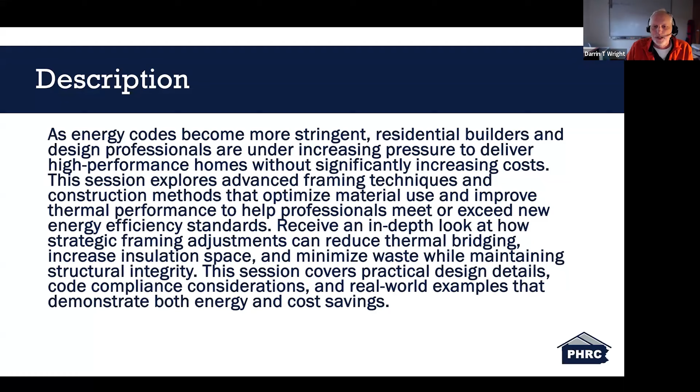We're going to do an in-depth look at how strategic framing adjustments can reduce thermal bridging and increase insulation space. This session will cover practical details and give you some examples of how these details can be achieved.

For the AIA people, our learning objectives: understand the principles and goals of advanced framing and how they differ from conventional framing; identify specific techniques; evaluate how advanced framing contributes to compliance with current energy codes, IECC; and we'll touch a little bit on voluntary standards such as Energy Star.

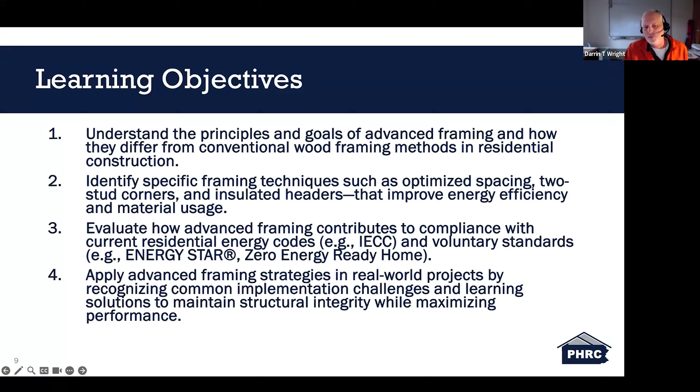Hopefully we can touch on all these things rather easily. We won't go into super detail on a lot of these, but we only have an hour, so we're going to try to touch on these as quickly as we can.

Agenda: framing fundamentals, advanced framing techniques, code considerations, and we'll do a little bit of a wrap up if we have time, and a Q&A.

First, I want to talk about what we mean by conventional framing. If you've been in the industry for more than 20 years, you can remember back when 2x4 framing was 16 inches on center.

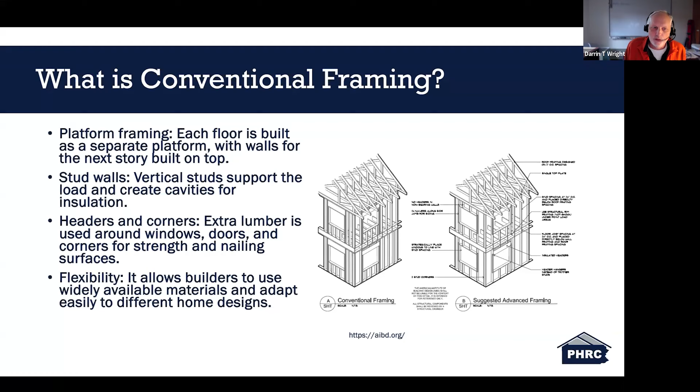When we think about conventional framing, that's really where we're going back to. It's still platform framing—each floor is built as a separate platform. Vertical studs support the load and create cavities for insulation. Headers and corners use extra lumber around windows, doors, and corners for strength and nailing surfaces. It's a flexible way of construction, which is why it's so popular here in the US.

But we're going to touch on some of the techniques used in conventional framing and how they differ from advanced framing, and also some of the drawbacks of conventional framing. We get a higher framing factor. That word, framing factor or framing fraction, is going to come up a few times throughout here, and we'll get into the details of what that actually means.

The cause and effect of that higher framing factor is you use more wood. Anytime you use more wood, you're using less insulation. Every time you use more wood, you have higher material and potentially higher labor costs. And there's really no structural benefit to conventional framing over advanced framing.

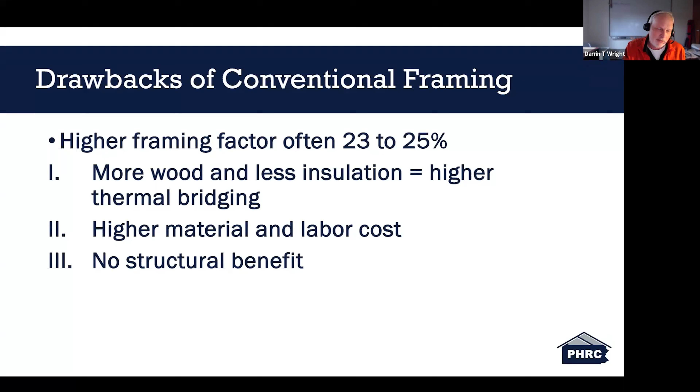That's one thing people get concerned about—maybe it's not structurally as strong as conventional framing—but I'll try to explain exactly how it is. We're going to start with a quick overview.

What is advanced framing? It's a collection of optimized wood framing strategies for performance and efficiency. We're going to cover quite a few different techniques when we say advanced framing. Some will be way more obvious to you than others, and some you'll think, yeah, I can easily bring that into my building practices. And some you'll look at and think, that's not for me.

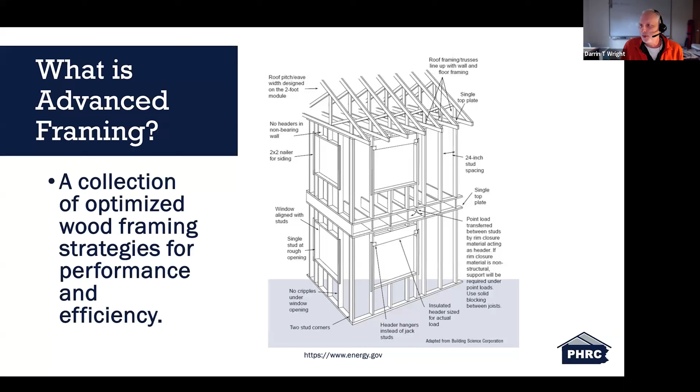These are things that are, for the most part, not a requirement when we talk about framing, and I'll explain that as we go along too. But they're just a way of optimizing both material and increasing energy efficiency in a home.

What does advanced framing do? The main benefit of advanced framing is to reduce framing fraction or framing factor. If you've been in this industry long enough, or travel from one part of the country to another, people call things different things. I'm going to use mostly framing factor, but it's also called framing fraction. It's a math problem we're talking about when we discuss this as well.

The framing factor, also called framing fraction or framing-to-wall ratio, represents the percentage of the wall's total area that is made up by framing members, which includes all your studs, plates, headers, etc. Any wood material used to frame that wall assembly is what we're talking about. When you reduce this framing material, you increase the amount of insulation that goes into that wall assembly.

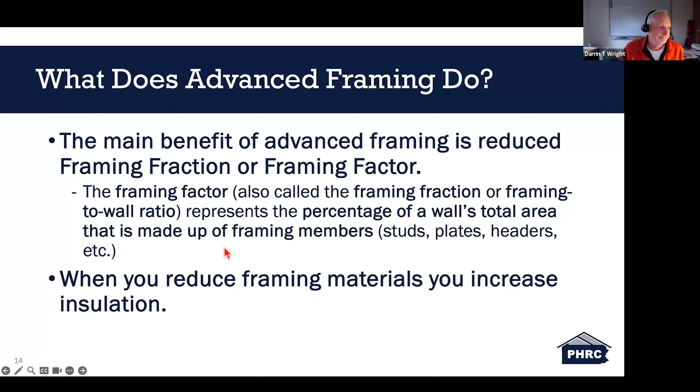Some more advantages of advanced framing: cost effectiveness. With the increased cost of lumber ever since COVID came through, we had that bump in lumber pricing, and it hasn't really come down a whole lot. We get some slight fluctuations, but lumber is one of those commodities thatstayed up a bit. So we're always trying to find ways of reducing the overall cost of a home, and that's one of the big things talked about now with residential construction and home ownership: how can we bring down the cost? This isn't a huge way of bringing down the cost, but it will, and every little bit helps.

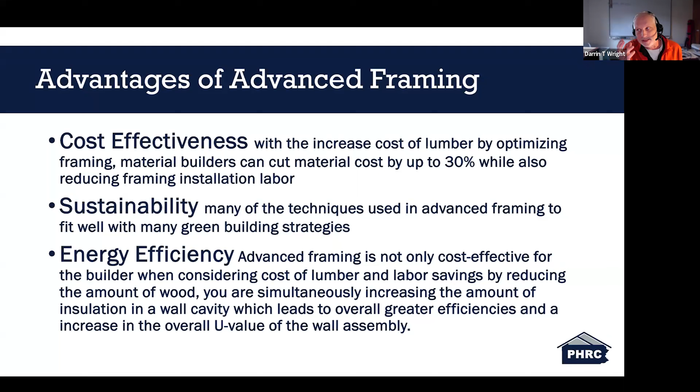And we talk about sustainability - many of the techniques used in advanced framing fit well with green building strategies. And energy efficiency: advanced framing is not only cost effective for the builder, considering cost of lumber and labor savings by reducing the amount of wood, you are simultaneously increasing the amount of insulation in a wall cavity, which leads to greater efficiencies and an increase in the overall U value of the wall assemblies. Anytime we can make a house more efficient, we're reducing the overall cost of ownership to the homeowner taking over this home. So the more energy efficient, not only is it sustainable, it's more cost effective for the owner as well.

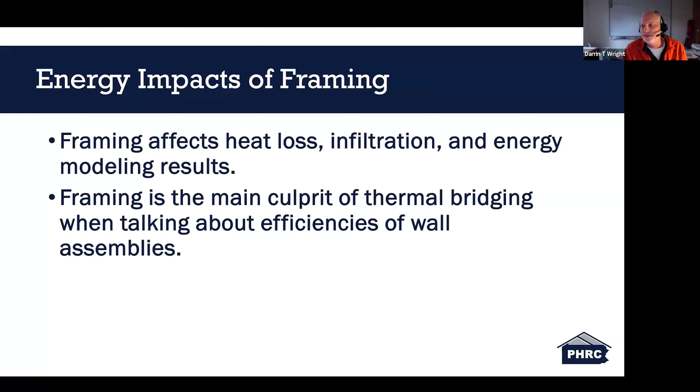Energy impacts of framing - how does framing impact energy? Framing affects the heat loss, infiltration, and energy modeling results. Framing is the main culprit for thermal bridging when we talk about efficiencies of wall assemblies, and I will talk about thermal bridging a little more here. If you've tuned into things we've talked about before, when we talk about framing or any of our energy code updates, we talk about thermal bridging.

So if you're unfamiliar with what thermal bridging is - we know what a bridge is, it's a way of moving from one side to another, like a bridge over a creek. Thermal bridging is basically the same. It's a way for energy to bridge the gap between the outside of the house and the inside of the house. Wood is not a good insulator - it has an R value of approximately 1 per inch. So those are places within the wall where we're creating a bridge between the outside and inside, or inside and outside, where energy can travel easier.

Thermal bridging in a wall assembly are areas of less or no insulation. And I want to point this out too: we will never eliminate thermal bridging. You just can't - the law of thermodynamics is what it is. We cannot stop that move of energy from one area to another. What we're really trying to do is create choke points and restrictions which slow that down. By reducing the amount of wood or bridging within that wall assembly, that's one of the ways we're doing that. There are other techniques as well, but we're going to mostly talk about framing when we reference thermal bridging in this presentation.

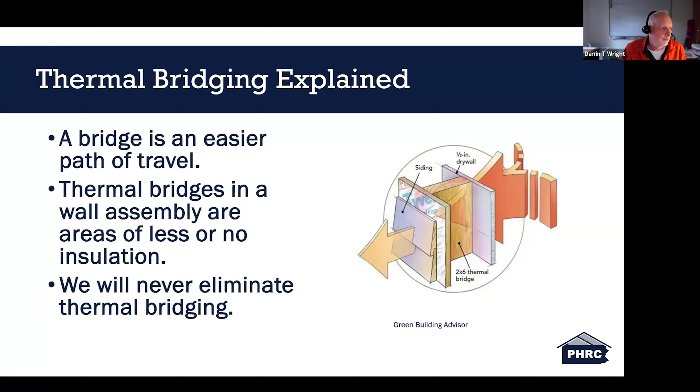Here's some impacts of thermal bridging. Here's an example: a 2x6 wall with R19 insulation - we think, all right, we put that R19 wall insulation in that wall, we have an R19 wall, but you actually don't have an overall wall value of R19. In research, I pulled this: Oak Ridge National Laboratories determined the whole wall R value to be closer to actually R12.

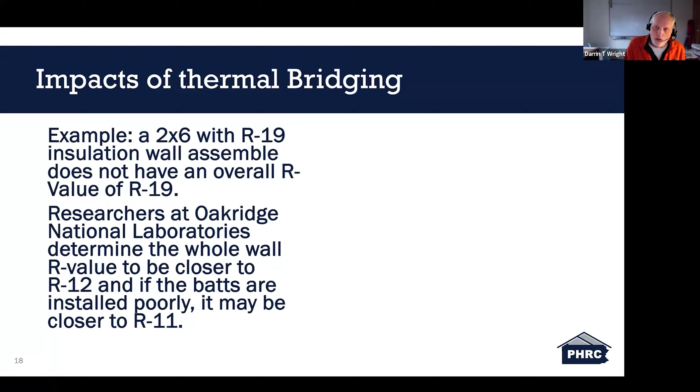And if you don't install the batts properly, you can be down to R11. And that right there is a direct result of thermal bridging. If you could theoretically have a wall with no wood in it at all, and it's just R19 insulation the whole way, and it's installed properly, you can get close to that R19 number. But because of thermal bridging, it doesn't. So it really affects the overall R or U value when we talk about the wall assembly itself.

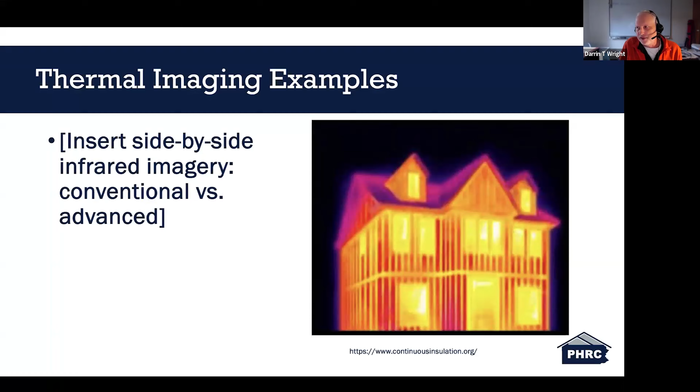Thermal imaging, here's an example. I don't have a picture of advanced framing, but this is what we look at when we see thermal bridging in an IR camera. This is very strong, very pronounced - definitely older conventional framing when you see how close those studs are together. You can see areas within that house that have insulation and areas that don't.

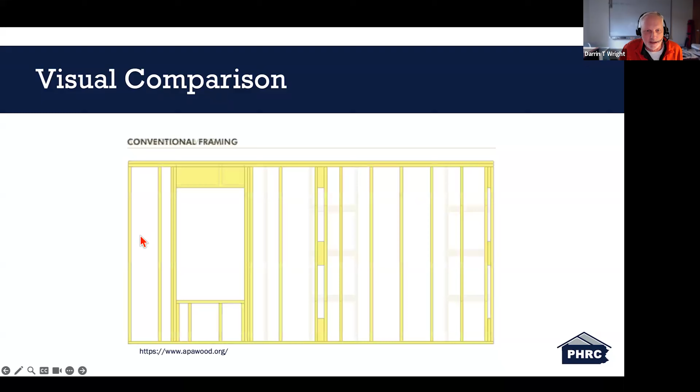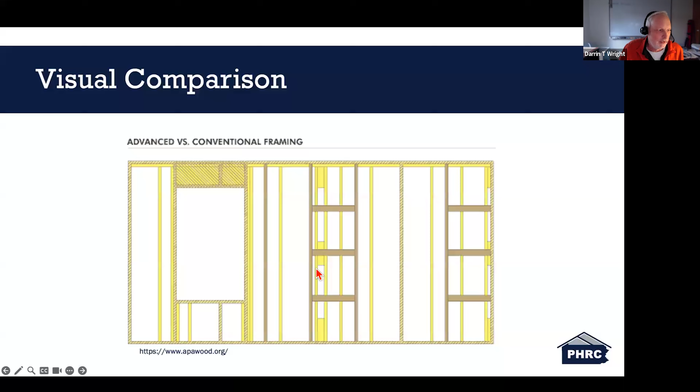Not all the techniques you see here are ones you might want to use, but we'll try to touch on some. You can see the jack studs disappear, they're using header clips, a single top plate. At wall intersection points, they're using cross bracing rather than the two-stud intersection point - but we'll talk about that as we move on.

A side-by-side comparison of conventional framing and advanced framing. One aspect is stud spacing - we're going from 16 inches to 24 inches on center. I think most people now are using 24 inches on center. That's what we have to do to create a cavity large enough to get the insulation level high enough to reach our R-value requirements on the fenestration table.

Conventional framing corners are old school 3-stud corners. We're moving on to 2-stud corners for better insulation optimization. Headers: you've got double 2x10 or 2x12 at all openings, insulated headers sized to load - that's advanced framing. Top plates: double top plate everywhere conventionally, versus single top plate with truss and joist alignment as a technique of advanced framing. When we talk about top plates, what is a framing factor?

Conventional framing factor, like I said earlier, is between 23 and 25%. With advanced framing, we're trying to get that down to at least 19% or lower.

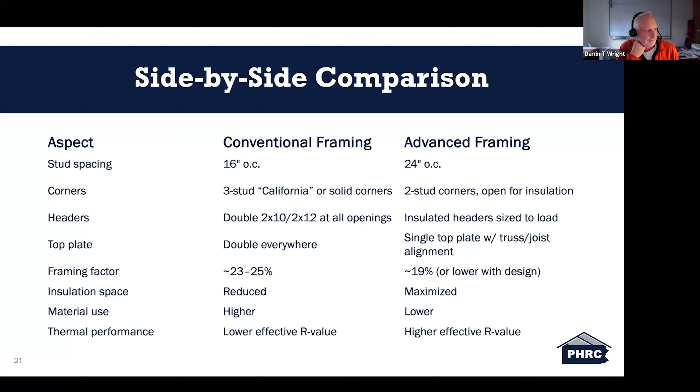With insulation space, conventional framing is obviously reduced, and we're maximizing with our 24 inches on center. Material use - we're actually using less material with advanced framing, and it can be a pretty significant amount of material savings. We also get an effective overall higher R value.

So we'll take some of the details here. When we talk about details, you're going to see me show some examples of things - that doesn't mean this is the only way to achieve this. It's just some of the most common ways out there. There are multiple ways of framing, so don't look at me like this is how I have to do it - it's not necessarily the case.

Design the headers based on the type of wall - load or non-bearing. This is an example - you're seeing a non-load bearing wall, and there is no header. I recently went by a job site a few weeks ago, just a conventional builder, and they were actually still installing headers over openings in a non-bearing wall. So you have to be conscious of where.

I know if you have a young framer in there and they're just framing away, that's what they know, but you've got to start paying attention. People need to start asking, do I actually need this size header? Am I oversizing things? You want to start looking at your details more closely when installing headers in non-load bearing walls.

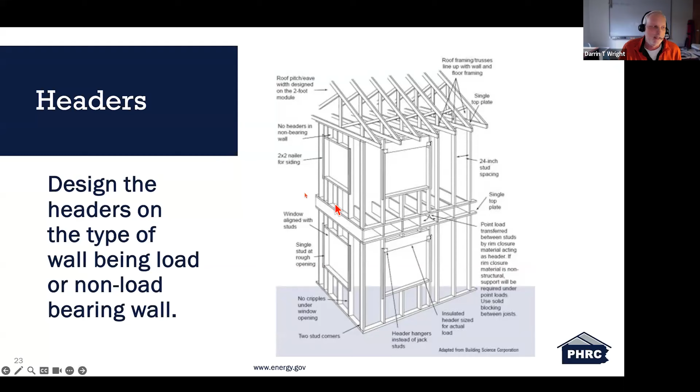To talk about headers a little more - this is mostly site-built headers. There's many different ways to order headers now. You can order prefabricated header material, or you can still use the old 2x method where you're installing 2x material. We want to start - and we'll talk about header insulation a bit later when we discuss compliance - there are different ways of insulating your headers, and how you insulate them might also determine whether you want the material on the inside or the outside.

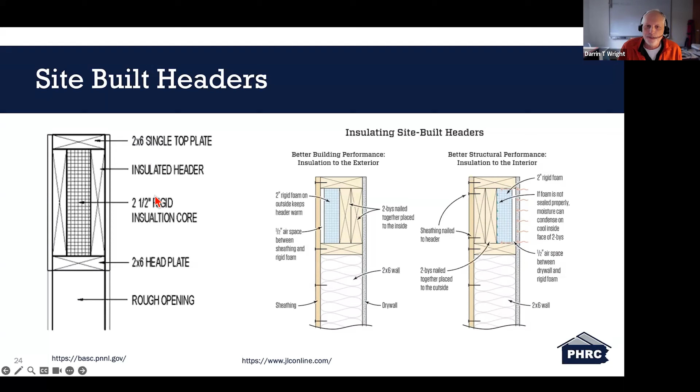There's really no wrong way or right way to do this at this point. The most important factor is making sure you're getting the proper insulation, or as much insulation as possible, into that header plate, into that header material. And obviously you can buy pre-manufactured headers. They're going to be a little more expensive, but installation costs might be a little cheaper because it's a little faster and there's a little less thinking involved.

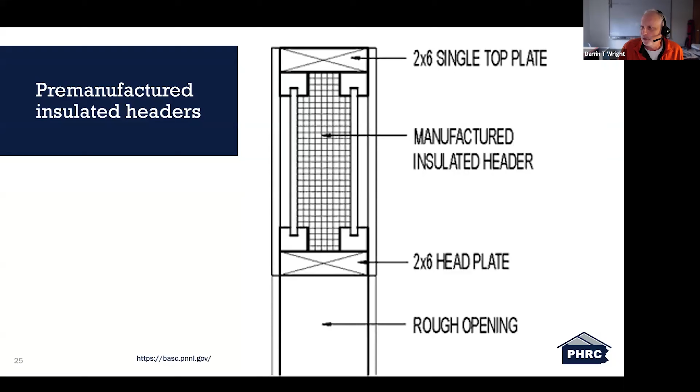If you want to make sure your crew is actually installing insulated headers correctly, this is an easy way of taking some of the worry out of it when you're not on the job site, making sure that it's being done properly.

Another thing we can talk about when we talk about headers and advanced framing is reducing the jack studs. This is not a very common method of construction here, just because people like to have that jack stud in there, not only for holding up the header, but also because it creates a better nailing surface for when we talk about trim details.

There's things you can do around it, and when you talk about cost, it's almost the same cost to buy that header clip, that supporting header from Simpson's or wherever you're getting it, as it costs to buy that piece of 2x material. So as far as cost goes, it doesn't really help, but it does help with lowering the overall U value of this wall assembly.

Again, we're removing wood in a location so we can put more insulation. Not all of these techniques are necessary, but if you're really looking to dial in, if your goal is to get your wall assembly as efficient as possible, header clips are another tool you can use to reduce your overall framing factor or fraction.

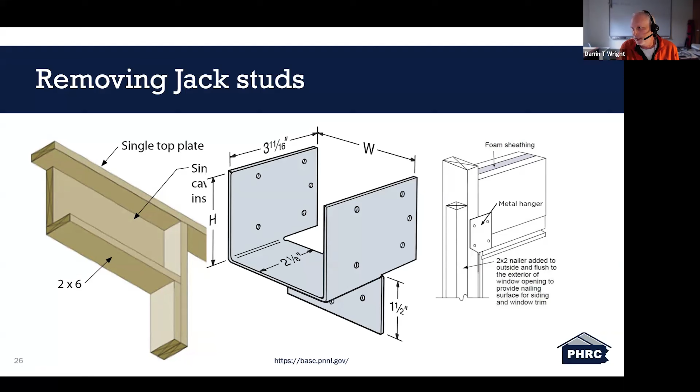Here are some of the concerns of header clips: load requirements still apply, these are engineered. You want to make sure you're using the correct size header clip that's engineered to support the size of the header you're putting in. Jack studs in conventional framing transfer vertical loads from the header down to the sole plate and foundation, and these clips are taking the place of those.

Bottom line, details need to be thought out. One of the biggest concerns people are going to have is the trim details, and how you're going to attach your interior trim and your exterior trim as well.

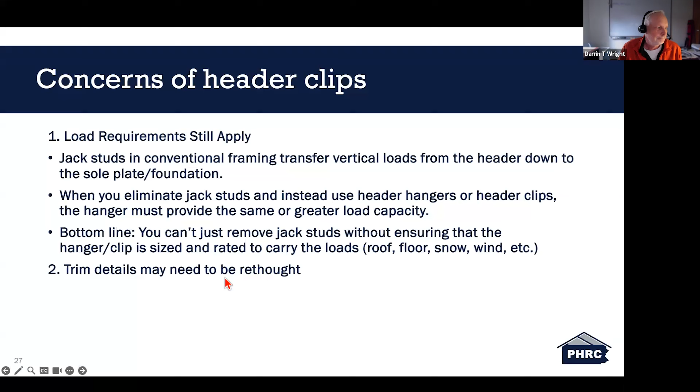Corners - this is a big one. Traditional frame corners, as you can see here, there's no way to get insulation into this corner. When I started in this industry many years ago, this is how we framed corners. Corners were just areas of connection on the exterior outside of your framing assembly, and you always wanted to make sure those connection points were strong.

So your building would be safe. And what we want to move forward with, especially when we talk about increasing the overall R value of our wall assembly, is removing some of that material in a way that allows us to get better insulation into the back of the corner.

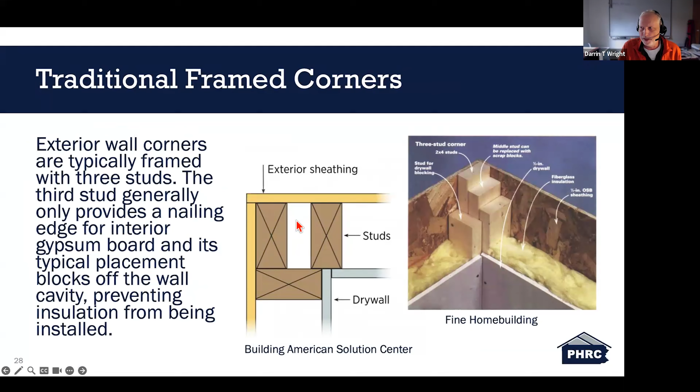Now, theoretically, you could jam some insulation in there as long as your sheathing's not in place. But anytime you try to pack insulation into a cavity like that, it's not going to be very well done, and you're still bridging multiple spots in this corner.

Now let's talk about insulated corners. It allows more insulation in the corners compared to traditional three-stud corners. Here are two different ways of doing that. The one on the left is a typical two-stud corner - we're all familiar with those California corners. These are great because you can still insulate that corner all the way back, as far as you need to insulate it, so you've pretty much reduced that thermal bridging in that corner.

Now, you got to be careful here when insulating these types of corners. If you're using fiberglass insulation, you don't want to compress it to get it back in that corner. You're going to have to do something a little different - maybe use foam board insulation cut to the width of that stud you're using as your corner. You want to make sure you're not compressing or installing insulation poorly in that corner. You still want to make sure you're installing your insulation correctly.

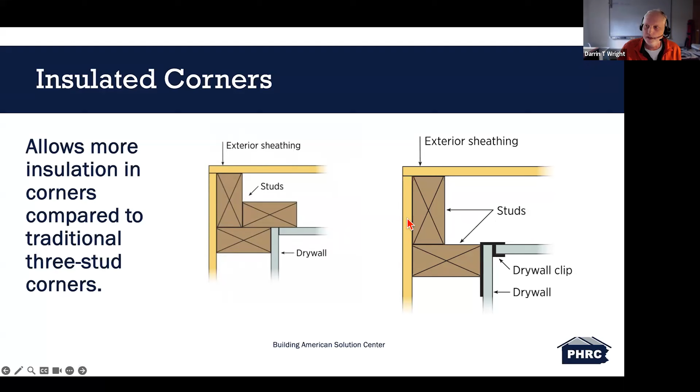Wall intersections. Traditional T-post intersection is what we're familiar with. The space may be insulated from the exterior, but traditionally it is left open, and it leaves a large 3 to 6 inch section of the exterior wall cavity poorly insulated or not insulated at all.

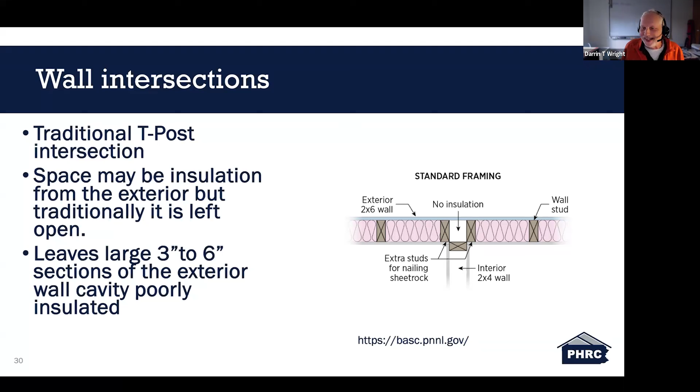And again, anytime you bring in, unless that wall intersection lands on a framing member or a common wall stud, you're going to have to not only have your 24 inches on center studs, now you're introducing more vertical framing material between those 24 inches on center where you're not going to be able to get insulation. You're just bringing in a lot more framing material into this wall assembly, and we're trying to get that framing material out of this wall assembly as much as possible.

A few different ways of addressing this. Ladder blocking at intersections is the most common type we see now. It doesn't mean it's the only way, but this is probably the easiest for people to understand. It simplifies connections and preserves insulation space, allowing for better insulation at wall intersections.

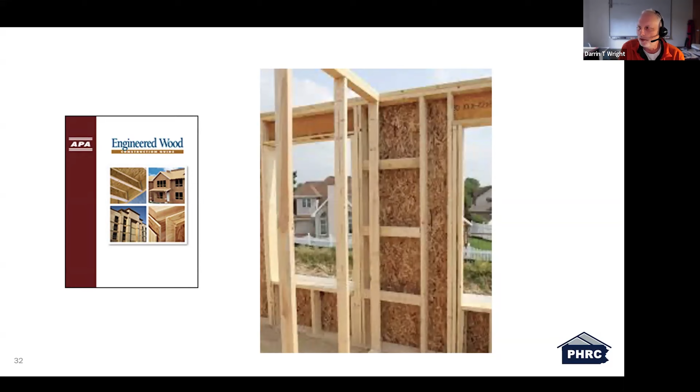And what you got to be more careful with here is if you have a 2x6 wall cavity and you're using a 5.5-inch insulation designed to fill that wall cavity, you're starting to get some compression at this point where you're having to slip it behind these pieces of 2x material. And that does start to compress, and it does start to affect the R value of that insulation. It's not a whole lot of space, but it is starting to affect the quality of the insulation installation.

And now some techniques for eliminating that. One thing you can do is support post-wall intersections. I've seen this a few times. All you're doing is installing a piece of, say, 1x6 on the back of that, if it's a 2x4 wall that's intersecting. Now if it's a wet wall using a 2x6, that's going to be a little different. You're going to have to find something else to go along with that. But what this 1x6 does is provide a connection point for your drywall.

And that's what the ladder is as well. With the previous slide, those ladders, their main objective is as a connection point. It does add some stability and rigidity to that wall assembly, but it's also mainly there so your drywall has something to attach itself to. Because once you nail that wall to the floor, the base plate, and connect your top plate, that's a pretty rigid wall assembly. So by using a 1x, you're really only compressing that insulation 3/4 of an inch. It's really not compressing that much.

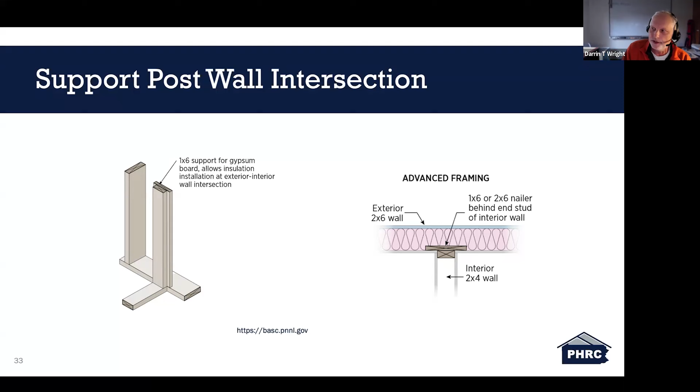The benefit of using the ladder system is there's a lot of scrap lumber laying around your job site, so that's the easiest thing to do. You just got to be careful you don't have somebody throwing 5 or 6 pieces of ladder in there, making it a lot harder to get insulation in, as well as compressing it.

And there's clips as well. You can use drywall clips when we talk about these connection points. Again, it's a technique not used very often, but that is an option. You can use drywall clips.

And if you happen to use a single top plate, which we'll talk about next, that connection point is still connecting at the top like you need to. But this advanced framing technique for a wall intersection limits all extra lumber within that wall assembly, and you're just using drywall clips. So you can insulate that cavity, and it'll be insulated like every other cavity within that wall assembly.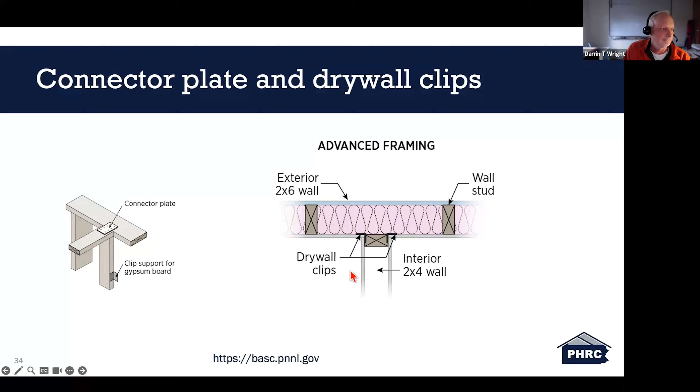Now I'll talk a little bit about single top plates, not a whole lot. This is, I think, one of the areas where people are less likely to get into advanced framing. There's a lot of things that have to be thought about when using single top plates. But it is a technique you can use. You're eliminating some material when you go from a double to a single top plate at the top of your wall assembly, but you're introducing some other potential headaches as well.

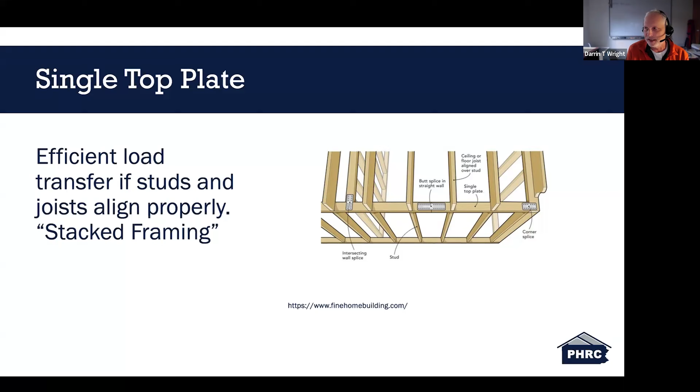So this is mostly an uncommon thing, unless you're really getting into advanced framing, like passive house design, where you're trying to get your framing factor down as low as possible. And there are things you have to consider when you're going to use a single top plate.

One of those things to consider is your bearing. You have to be more conscious, and we use what's called stacked framing, where if you have that single top plate, you want to make sure your rafters are bearing directly over your wall cavity stud. So you're transferring your wall loads directly down your wall assembly. We all understand structures when it comes to load, and how to transfer loads from the roof down to the foundation.

And I am not 100% sure on the code language on this, but I think if you're doing the stacked framing, stacking your studs underneath your rafters or your rafters over your studs, you have to be within 3/4 of an inch of alignment. You pretty much have to be right on - you can't offset that at all. Playing on zero is what you want to think about.

But it is a possibility. When we talk about a single top plate between floors, you have a rim joist which acts as a header at that point. So your load transfer concern is a lot easier to think about there than it is when you talk about where your rafter meets your top plate.

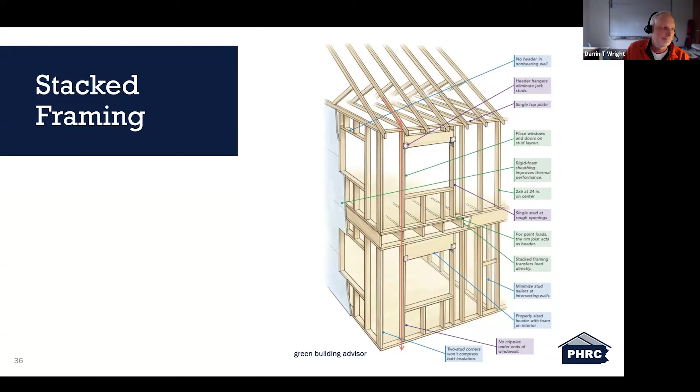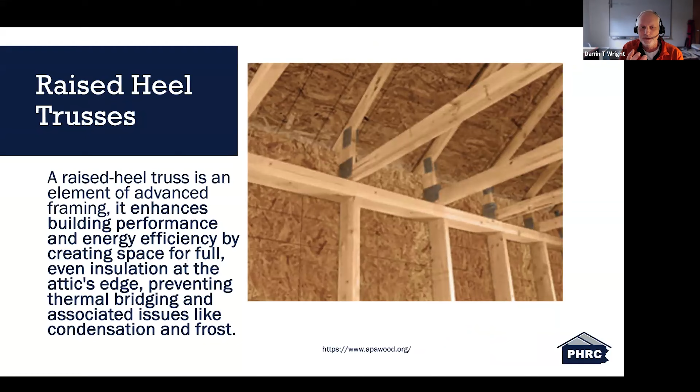Raised heel trusses are becoming a lot more popular because of the R value requirements, but they are a type of advanced framing. You're not going to frame these things on a job site. This is something you'll think about when ordering your trusses. It's an element of advanced framing. It improves overall efficiency, creates space for a full cavity of insulation up there, eliminating a lot of thermal bridging. This is considered part of advanced framing.

Advanced framing and energy code compliance. I'm going to touch on certain things and try to get a bit more in depth in certain areas, but this is how advanced framing plays into energy code compliance when we talk about Pennsylvania. If you've been to one of our webinars before on PA UCC Residential Energy Code, it's a combination of the IRC and the IECC. We have our RAC amendments, and we have statutory amendments, which I won't mention here, but those are basically how our UCC is determined.

We also have what we call the Pennsylvania Alternative Residential Energy Provision, and I'll talk about that in more depth and why I think that's going to be important when we talk about advanced framing moving into the new code cycle that we're moving into, which is right around the corner.

Advanced framing in the IECC - the code doesn't mandate advanced framing by name, but it supports and rewards its use because it reduces thermal bridging. Less wood equals fewer heat flow paths and increases insulation volume. This means builders can use advanced framing techniques to meet or exceed the prescriptive R value or U factor requirements for above grade wall assemblies, or improve results in the RESNET/ICC 301 energy modeling pathways.

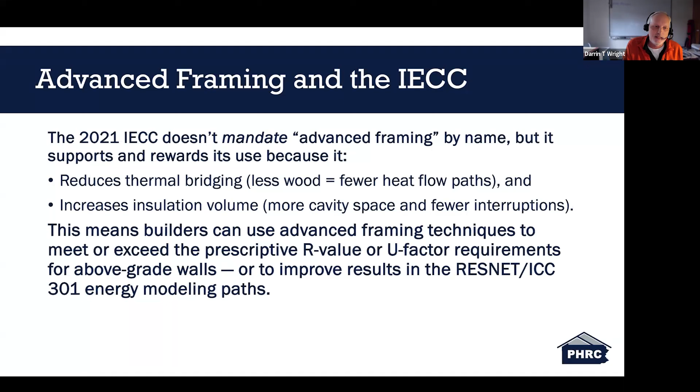How it fits within the IECC 2021 compliance paths - I've tried to make this as simple as possible. The prescriptive path, R402.1.2, helps meet required cavity plus continuous R values. By reducing framing factor and improving effective R values, a 2x6 24-inch on center wall might meet the R20 plus 5 or R13 plus 10 prescriptive requirements more easily.

If we're talking about R402.1.4, the U factor alternative, it lowers overall U value, reduces framing factors - we're getting that framing factor down to where it needs to be, out of that 25% range - and often qualifies walls for compliance even with slightly lower nominal R values.

Then we've got the simulated performance paths, where we're modeling our performance paths. It's a method of boosting your model efficiency in an energy modeling software. The improved whole wall R value from advanced framing yields lower energy use and better ERI scores.

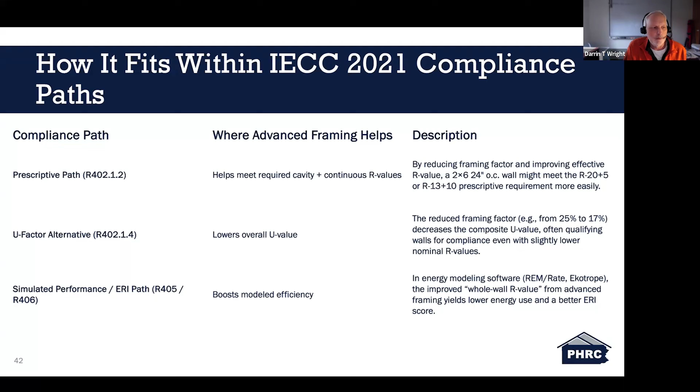In the prescriptive path, builders comply by meeting the minimum insulation R values or maximum U factors listed on table R402.1.2 for their specific climate zones. This is a prescriptive path - just like if you follow the IRC and follow that path, it's already laid out exactly what you need to do. Each building component, such as walls, ceilings, floors, windows, doors, must meet or exceed these requirements.

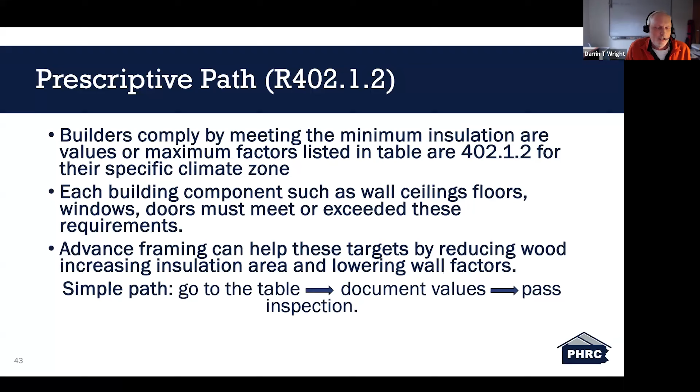Advanced framing can help hit these targets by reducing wood, increasing insulation area, and lowering wall factors. It's as simple as this - a simple path. You go to the table, you document the values you're using, and you can pass inspection, hopefully.

In the U value alternative, an assembly with a U factor equal to or less than the specific table R402.1.4 shall be permitted as an alternative to the R value in table 402.1.2. Even though this is a calculated method of compliance, it is still considered prescriptive, not performance-based.

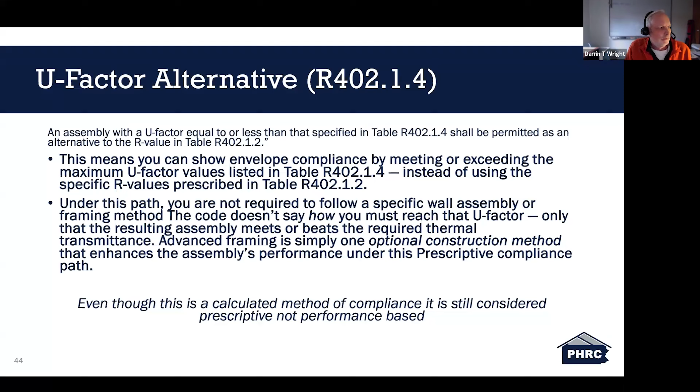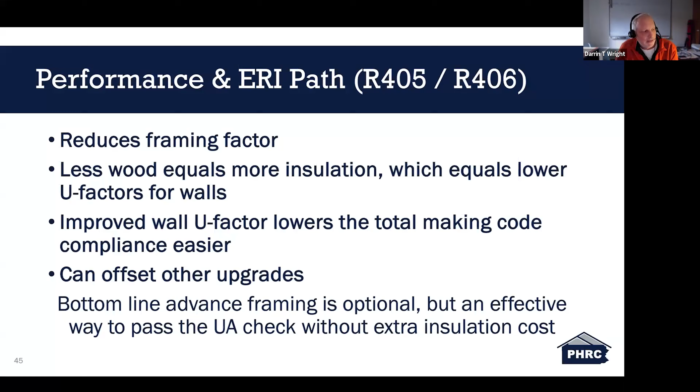I'm going to move on through a little bit faster here because my time is starting to get into me. In the performance and ERI path, which is R405 and 406, again we're reducing framing factors - less wood equals more insulation, which equals lower U factors for walls. Improved wall U factor lowers the total, making code compliance easier, and can offset other upgrades. Bottom line: advanced framing is optional, but an effective way to pass the UA check without extra insulation cost.

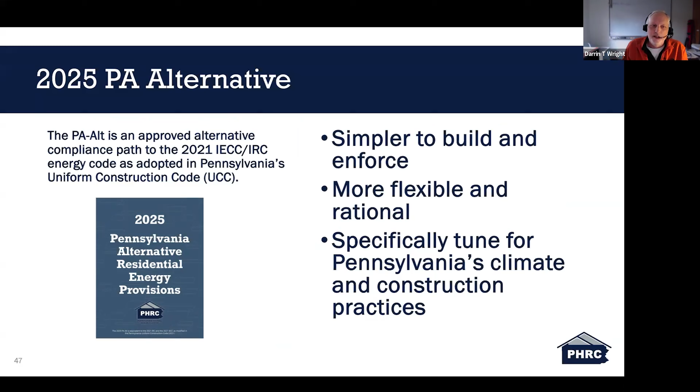What I want to do is talk about the PA alternative a little bit, because it's put out by the PHRC. It's an approved alternative compliance path for the 2021 IECC/IRC Energy Code as adopted by the Pennsylvania UCC. It makes it simpler to build and enforce, it's more flexible and rational, and it's specifically tuned for Pennsylvania's climate and construction practices. It's specifically designed for Pennsylvania and the Pennsylvania UCC.

And like any other prescriptive path, what we've done here is we've done the modeling for you, so you don't have to. It's like a performance path, but in prescriptive form. Since we've done all the modeling for you, it makes it easier for a builder to look at this and understand exactly what they need to do as far as what we call trade-offs are concerned.

Trade-offs mean, with a performance path, if you are more efficient in one area of your building, you can be less efficient in another. But what we want to do is always make sure we're balancing these trade-offs and requirements with the UCC code requirements. So we're always aiming at having that overall wall assembly still maintain the required U value, or overall home U value, but doing it in a little bit different way. With the new energy code requirements adopted by the UCC, I think the PA alternative is going to be a really good way for people to meet the future energy code requirements.

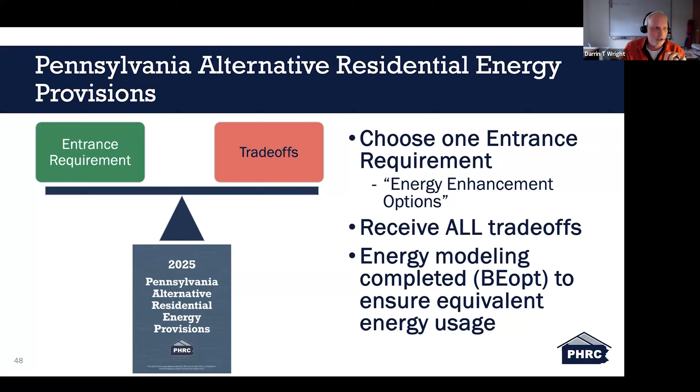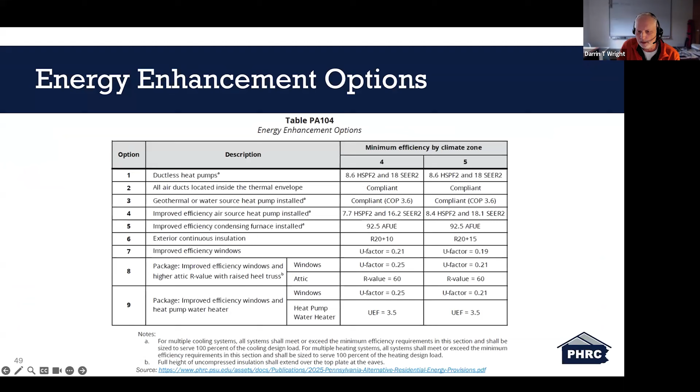So again, you can see what we're saying here is, for the R20, you're able to reduce that down to an R18. And for the R23, that was the H note - R20 insulation shall be permitted in place of the R23 requirement, provided the construction of the wall is of the advanced framing type, has a framing fraction of 19% or less, and insulation is installed per the ANSI ResNet ICC 301-2022, section 4.2.2.1, table 4.2.2(6).

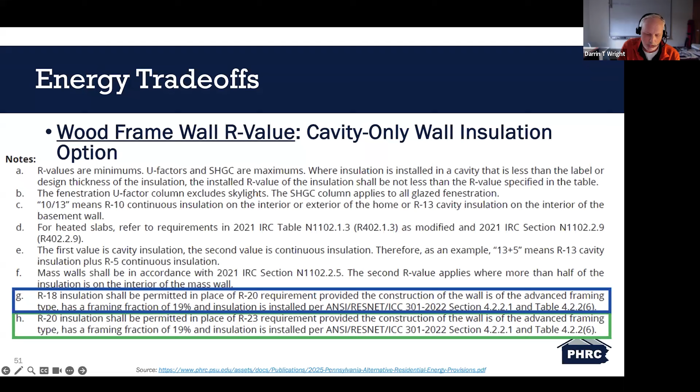What's that table? The 2022 ANSI RESNET ICC table—you can find this online pretty easily, and it spells out exactly what that section details.

Section 4.2.2.1 states a framing fraction shall be designated for each segment of framed wall. It breaks down what they refer to as a segment: basically from the top plate to the bottom plate, and from left to right of the wall assembly. A wall segment is defined as a planar section bound by wall corners, the top plate, and the bottom plate.

Some wall assemblies might be slightly different—your framing fraction might differ between assemblies, say if you have trouble framing for some reason. But what we're always trying to get here is a framing fraction of 19%.

That's what you need. If different framing fractions are designated for different segments of the framed wall, floor, or ceiling assembly, multiple entries are permitted to be entered into the rating software. So you can have different percentages of wall assembly entered individually, or alternatively the entire assembly can be modeled with the highest designated framing fraction.

For ratings where the framing is not visible at the time of site inspection, the framing fraction shall equal the highest default framing fraction of the assembly component listed in table 4.2.2(6). So if a wall assembly has drywall put on before it's inspected, you automatically default to the highest framing fraction. I can show you what those are now.

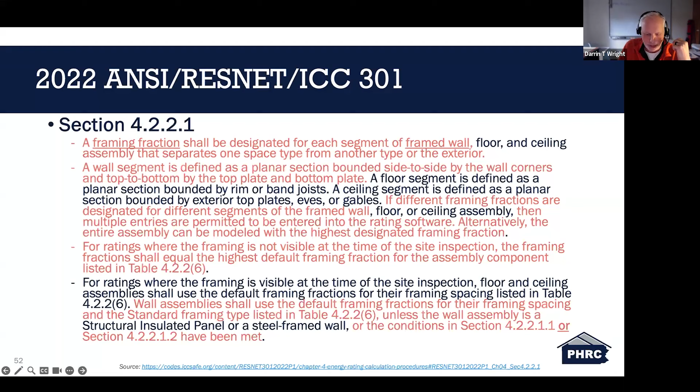So you want to make sure that if you're going to the bother of doing all this advanced framing, it's able to be inspected. Now, to get to the advanced framing and the ability to use that 19%, the framing type has to be advanced type framing to qualify.

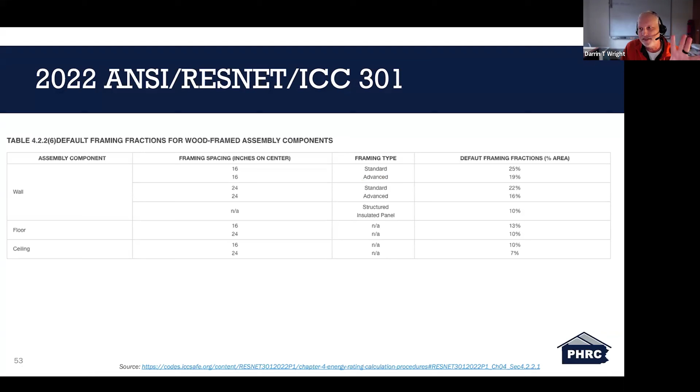To get you to that 19%, you need to use advanced type framing assembly. Per 4.2.2.1.1, the default framing fraction for the advanced framing type—that's what we're looking at—is permitted to be used if the wall segment complies with all the following.

So you have to use all of these advanced framing strategies to qualify, and we've talked about them all. Corners of the cavity shall be completely filled with at least R6 or greater insulation, so you need to make sure you can get R6 or greater insulation into your corner cavity. If you're using fiberglass insulation and compressing it to get it in there, you're reducing its insulation ability—I think the easiest way to do that is probably foam board, but you want to make sure you're complying with that portion.

Intersections with interior walls shall be insulated to the same R-value as the remainder of the wall assembly—we talked about those wall intersections before. You want to make sure you can get your fiberglass insulation in there and installed properly as required.

Headers of a framed wall shall be insulated to at least R3 or greater for a 2x4 wall assembly or equivalent cavity, unless you're using a 2x6 wall cavity, in which case your header insulation has to be at least R5 or greater.

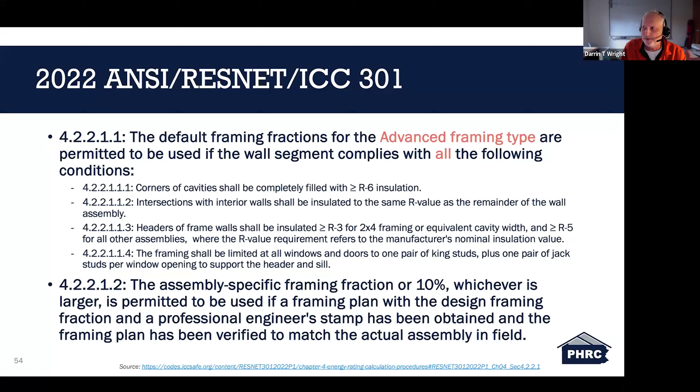Per 4.2.2.1.2, you can have an engineer design the assembly—the assembly-specific framing fraction needs to be at least 19%. So instead of following all the conditions above, you can have an engineer design a framing assembly that meets that 19% target to qualify as an advanced framing type. Again, what we're doing is getting our insulation framing fraction from the traditional 25% down to at least 19% or less.

Energy Star, if that's a different beast here than what we're talking about. There is framing involved when we talk about framing requirements for Energy Star, when we talk about our checklists.

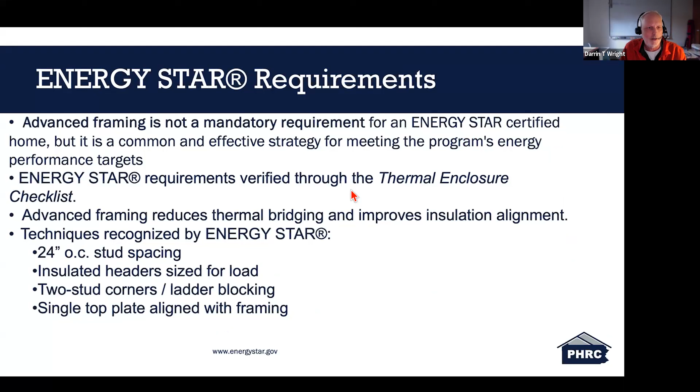Since we're at 155, I'm going to go through here. I'm just going to show you the checklist, and you can see part 3 down here.

If you're familiar with Energy Star, not a lot of people use this method, but if you do, you can see down here when we talk about thermal bridging, all the way down here, section 3.4.3, advanced framing.

Including all of the items below, basically almost listing all the items we just talked about before.

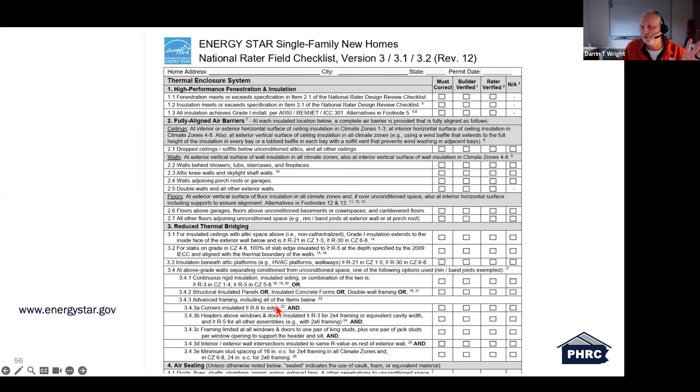So advanced framing, yeah, it's important. And it's important, especially when we start talking about these alternative pathways, when we talk about complying with our energy options.

Architectural and design coordination. This is going to be pretty important, especially if architects and designers are talking to new framing crews, if they're talking to new people they're not used to working with, and they want to make sure that they're coordinating these details specifically.

It's important, you know, communication between the design and the field is critically important, especially when you're doing things that aren't traditional.

You know, things get lost. It's like the old thing where some person whispers and another - we all did this in school, where we pass information down the line.

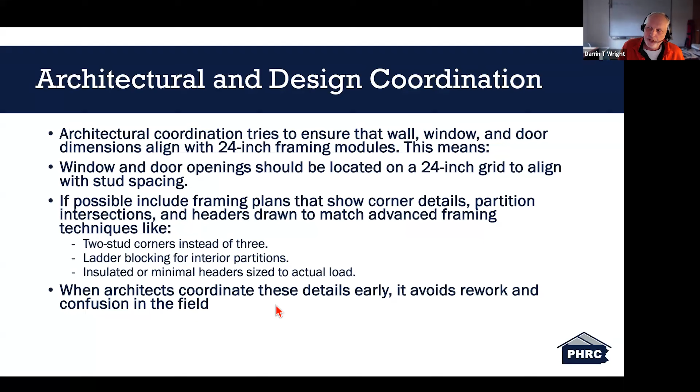By the time it gets down to the crews framing the wall assemblies, if the coordination and the communication is not clear, we could have issues. Yeah, we want to make sure that that's taken care of.

In trade coordination, not only do we want to talk to the framers, when we talk about trades, we also want to make sure we're talking about changes to framing when we talk to electricians and things like that, HVAC technicians. Advanced framing isn't just a frame tweak, it changes the stud spacing.

It changes our corner and header configurations, our single top plates and stack framing, and reduces extra lumber at openings and intersections. Because of those differences, other trades can't just build as usual.

They might have to make some considerations when they're talking about what they do. Every penetration, fastener, or attachment point that depends on traditional framing now lands in a slightly different place, especially if

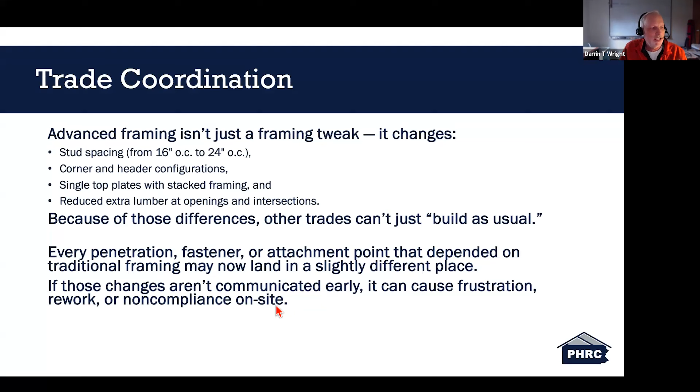we're talking about single top plates over a double top plate. If those changes aren't communicated early, it can cause frustration, rework, and non-compliance on the job site.

And then one way to do that is detail callouts. You might not have a framing plan, but if you're concerned about the framers or somebody not complying with what your description is, you might actually want to slip a detail in there, a drawing detail of that wall intersection, of that corner, and how you want that insulated specifically.

It reduces ambiguity and prevents misinterpretation by providing all the necessary information, improves accuracy, ensures that components are constructed and installed correctly according to the design.

And again, I like this engineered wood PDF. I printed this out, I have this. It's from the APA, but there are other versions of different things out there, and they go into really good details.

And if you want to communicate this to a framing company or a crew, print this out. It's not very many pages, and give it to them. Make sure that somebody has access to this document if you're concerned. It helps eliminate some concerns and helps illuminate what we're trying to communicate.

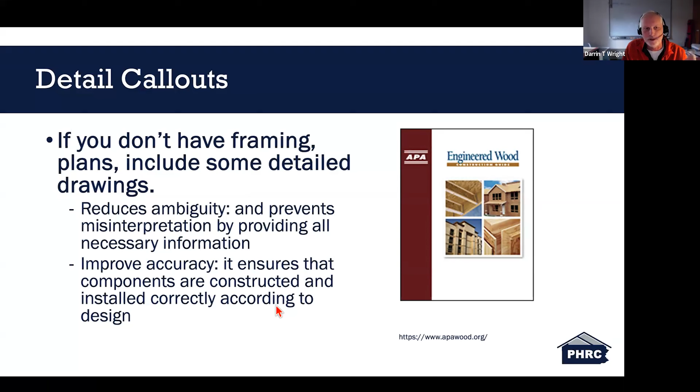Key takeaways: advanced framing is structurally sound when done correctly. Some people try to say that it's structurally weaker - it's not, you're still creating a structurally sound house. It takes no more time than conventional framing.

It's too difficult for framers to implement - that is absolutely not true at all. Anybody who can do conventional framing can do advanced framing.

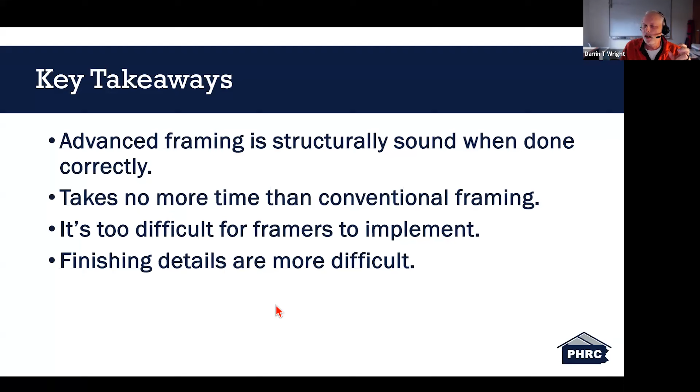Finishing details are more difficult - they can be if we're talking about eliminating jack studs, if we're talking about single top plates, but generally they're not.

There are things that we can do, like I said, if you're not using a jack stud, using header clips, we just install 2x2 backers for our trim work.